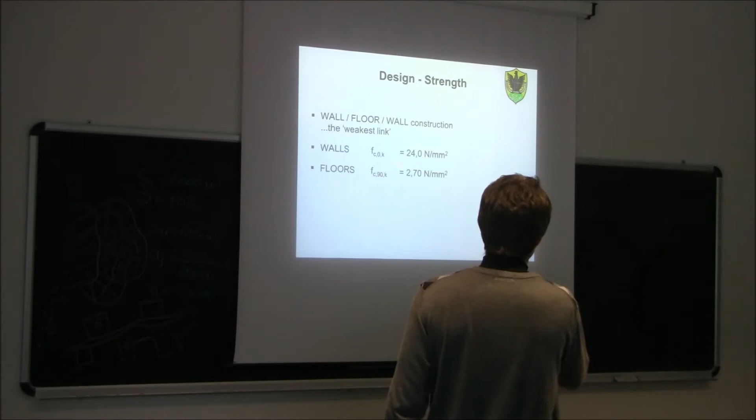So the weakest link comes from the fact that we have a floor which has a resistance of 2.70 Newton per square millimeter perpendicular to the grain, and it is squashed by walls which have 24 Newton per square millimeter resistance. So at the end, this is almost less than 1/10, and this is going to govern the design. So that's why, particularly at the lower stories, when the load becomes higher and higher, they have to strengthen, you see here, the connection between the wall and the floor.

And the way to strengthen it was, as we already discussed several times before, to use some reinforcement, self-tapping screws that in some way help transfer this pressure from the edge of the wall itself into the panel itself. So in other words, with the screws we're going to distribute this concentrated load above and beneath the wall into a larger area within the floor itself. Okay? So that's the kind of reinforcement that was done here.

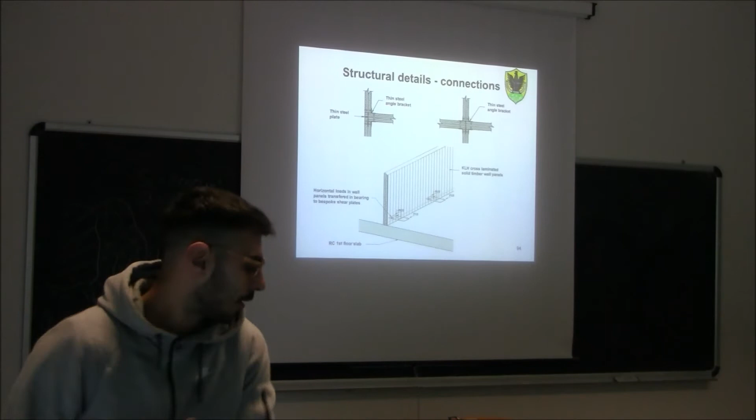So here you can see the type of connection. In this case, we have no different connectors for resisting the uplifting force and for resisting the shear force. So we have only one type of connection, this kind of angle bracket connected with screws and nails, that functions as hold-downs when placed at the end of the wall, and as angle brackets when placed in the middle of the wall. So no difference between hold-downs and angle brackets, only use of angle brackets. Why is that?

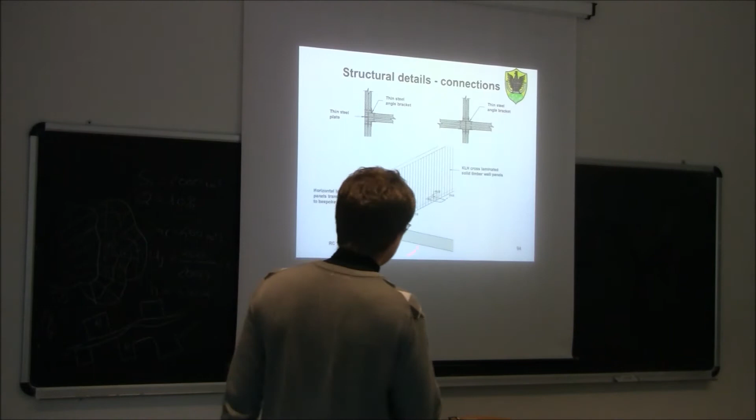Because, again, we are talking about design and construction of a building in London, which is not a seismically active region. It's also not a very strong wind region, meaning that the horizontal forces don't play such an important role, like here, for example. The hold downs are mostly meant to resist uplifting, so axial force, but in this kind of building we don't have very high uplifting forces because we don't have earthquakes, and the wind is not very strong. Okay?

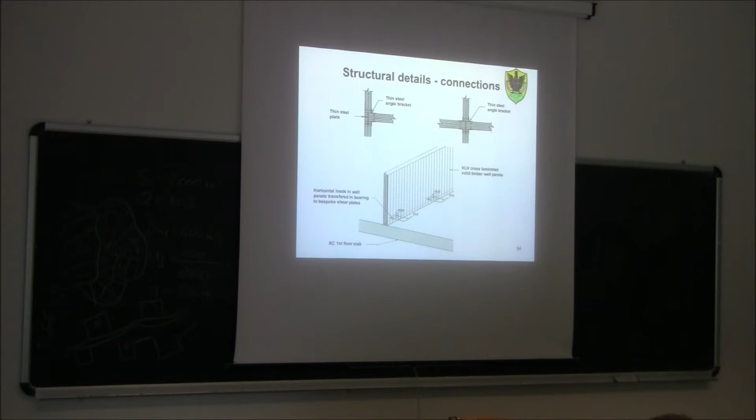And then you have another point of the building, which is quite important because we're talking about a 9-story building. A very important problem with any multi-story building with residential destination is acoustics. As you know, acoustics is a serious problem, even with reinforced concrete. Sometimes we have a problem that if you have two different apartments, one above, one below, very often who lives below can hear what they do above and vice versa.

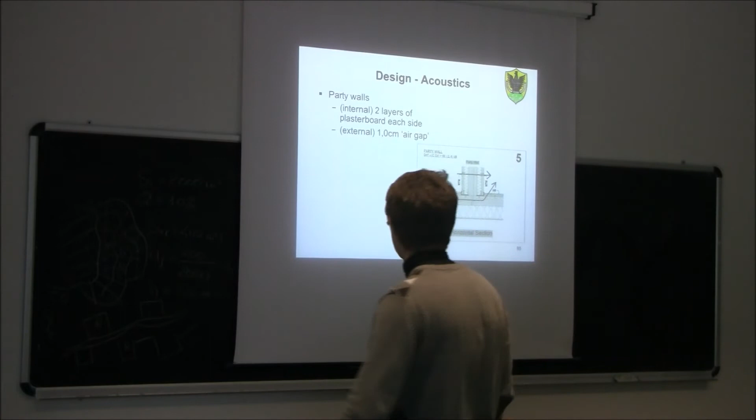So how can we solve the problem of acoustics? Just keep in mind that acoustic separation depends on the density of the material. So if it's concrete, you have 2,500 kilograms per cubic meter. If it's wood, you have only 500, so 5 times less, meaning that the acoustic separation is also 5 times less. So with timber, we might have a problem. So how to solve this problem?

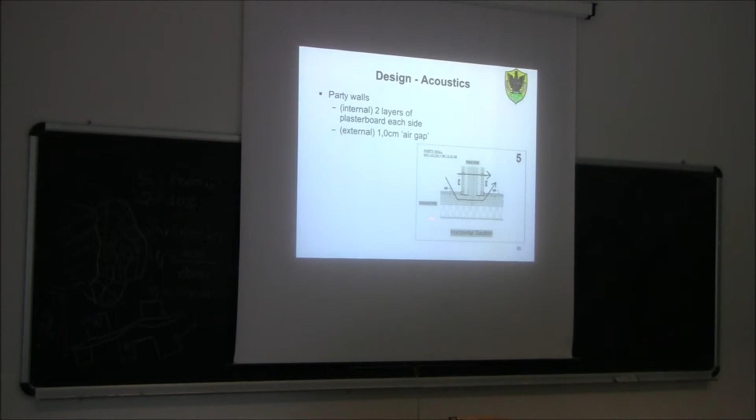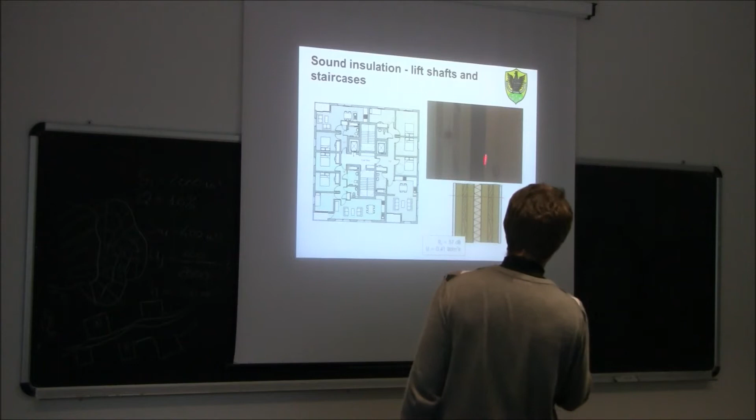We have different details. You can see here some possible details for party walls and floors. For example, you see that we have a double wall at the interface between staircases and living units, because in this way, first we have a larger fire resistance, but also a larger acoustic resistance. You see two panels with acoustic insulation in between. Of course, the simple solution is this one, where the acoustic separation is very poor, and then you have different possibilities in order to do the acoustic separation.

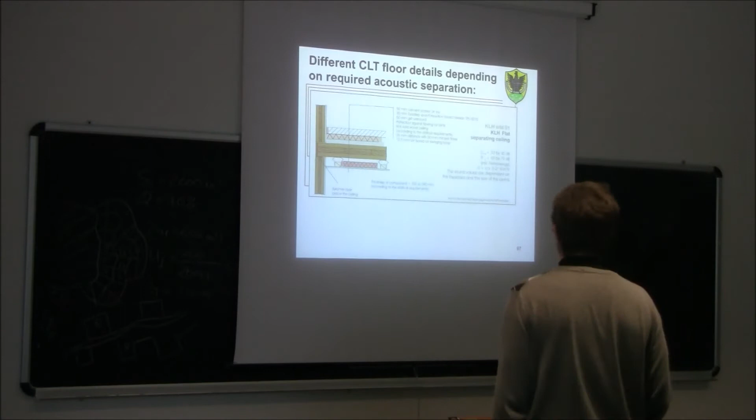Other possibilities are with, for example, some resilient ceiling below. And you can also go to much more performing solutions, like having a double floor, and so on. In terms of fire, there was a minimum fire resistance required in this building, because we're talking about a residential building.

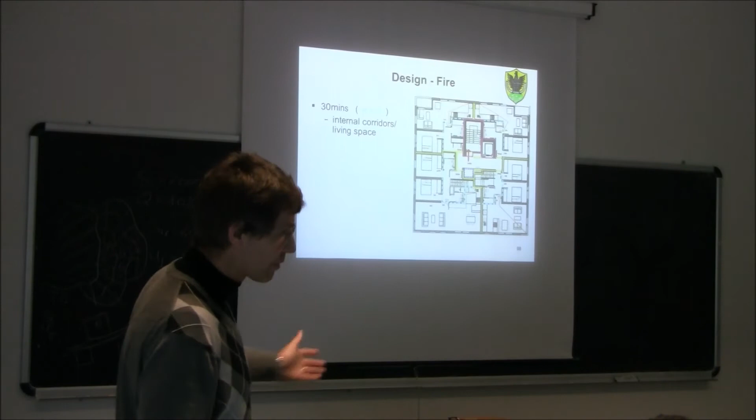So, as you can see here, these dashed lines show some walls that had to have at least 30 minutes fire resistance. Now, we haven't spoken so far about fire resistance. I will give you a final lecture discussing fire resistance, because of course for timber it's important, being a combustible material. So 30 minutes of fire resistance basically means that if you have a fire on either side of this wall, this wall should be able to stay in place and resist the vertical load for 30 minutes at least, and during these 30 minutes it shouldn't allow flames to go through, and it should not transfer too much heat from one side to the other.

So what we usually call REI in Italian, which is resistance, isolation from the heat, and isolation also from the smoke. There are basically three parameters. We will see later on. So basically, all these walls within the dashed line had to be at least 30 minutes fire resistance, which are the walls between the internal corridors and living space, or between the day or night rooms and the corridor. Then 60 minutes separation between different units, and between the units and the egress system. And 120 minutes for all these walls around the lift shaft and the staircase.

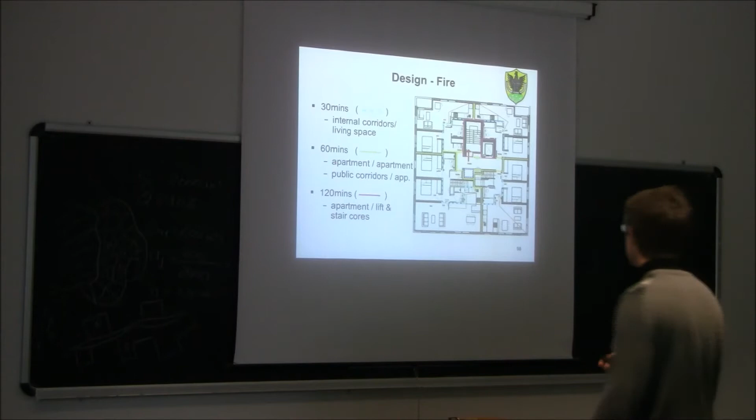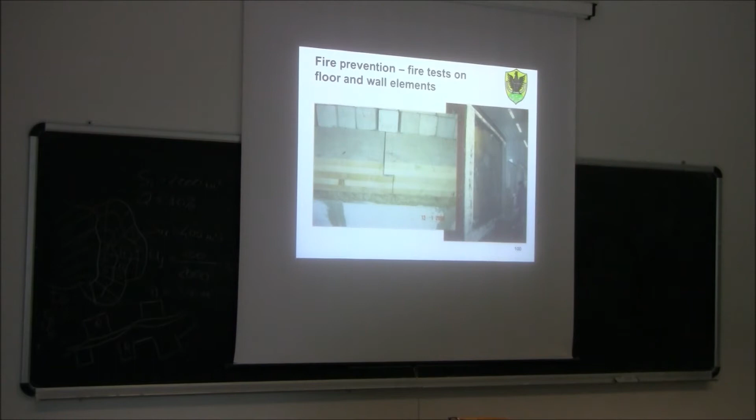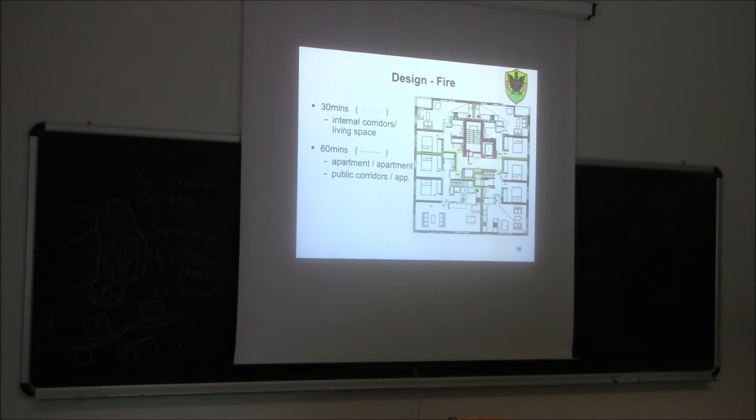So in the end, the result of this experimental campaign was that the fire resistance of all load-bearing components was 90 minutes. So one panel like this can resist up to 90 minutes. The fire resistance between apartment, lift shaft and staircase was 120 minutes because 2 panels were used. So around the lift shaft, where 120 minutes fire resistance was required, a double panel was used in order to get a higher fire resistance.

Some photos about... yes, interesting thing: they didn't have to use any sprinkler system. You know what a sprinkler system is? It's a kind of system using water that can spray water once the fire is detected. For example, here we could have fire sprinklers inside here. Probably you don't see anything.

There is something... no, this is just... we don't have. But why we don't have? Because we don't have lots of combustible materials inside. Here the combustible material is basically this. Nothing else, except of course the clothes. For this reason, probably we don't have such an important risk to impose the use of sprinklers and fire detectors. Here we don't have either sprinklers or fire detectors. We just have the board indicating that we have to go away.

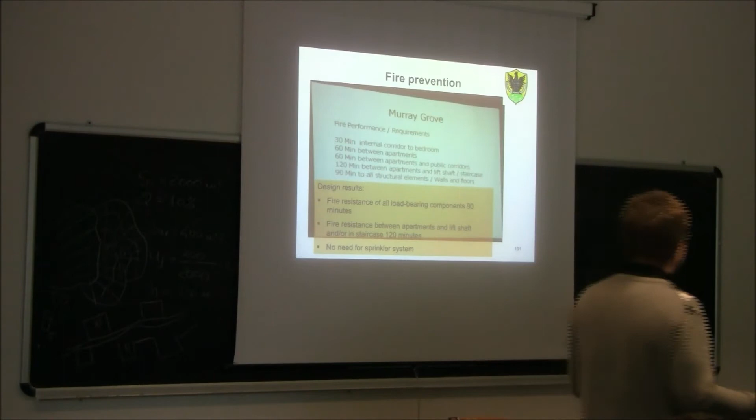Okay, so in this case again, although the building was quite high, and there were thousands of cubic meters of wood, which is potentially combustible, no sprinkler system was required.

Okay, some photos about the construction. You can see here this group of 4 skillful carpenters. So here, we are on the top of one of the floors. So this is the floor, basically. So first you see they place these angle brackets all around, already screwed. And then you see the panel is coming, and then the angle brackets are connected to the wall panel. Of course, the panels are as long as the whole wall, if possible.

They are already cut. So all these panels you can see here with the cuts were produced in Austria, and they were shipped by lorries from Austria to London. Temporary props here: as we said, we have a box without the lid, meaning that the structure is not very stable, and we need to use some temporary props like here. Another photo. This is the building upon completion, towards the end of the project.

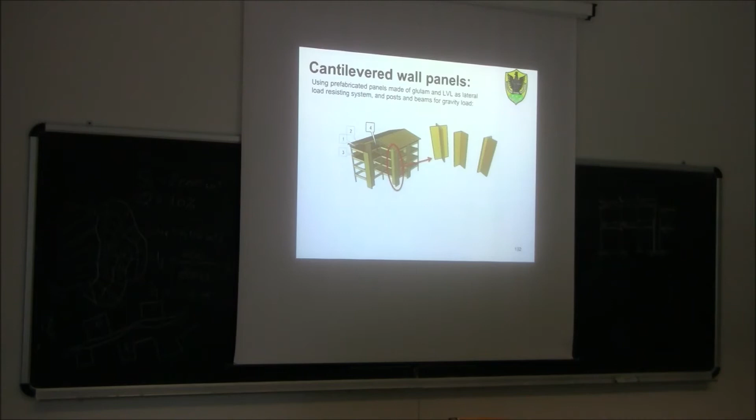Here the wall can be made, you see, by assembling together some simple rectangular elements. Those rectangular elements can be solid, or, like in this case, made of a glulam frame with top and bottom sheathing made of LVL.

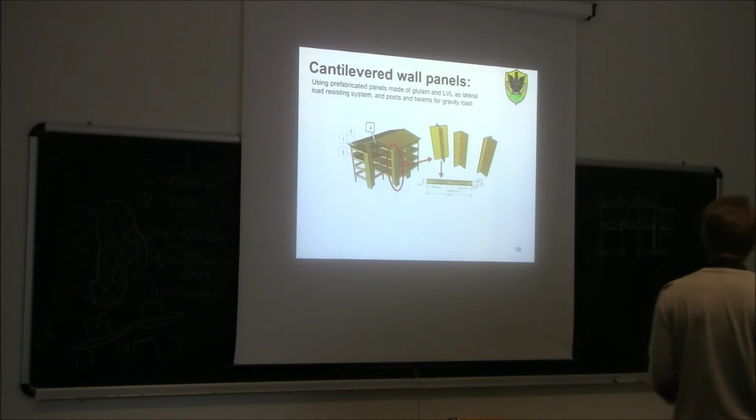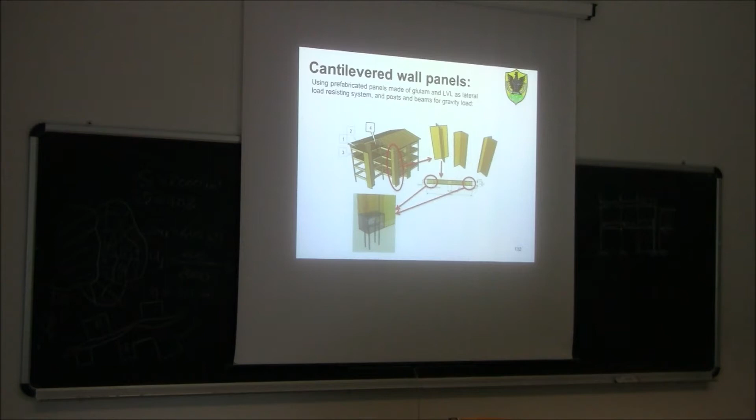The connection of this panel to the foundation can be obtained using, for example, this steel hub, which connects the wall to the foundation using epoxy rods. So rods which are glued inside the wood on one side, and, more than glued, connected to the foundation using some mortar on the opposite side.

This is a photo of this detail, and this is the result of experimental testing where we push the wall laterally, like in the case of an earthquake. If you push it, the wall tends to uplift here, and of course we may have a failure in the glue connecting the rods with the wood panel itself.

This system is particularly suitable for open spaces, because having a system made of posts and beams, you can have spans from 5 to 8 meters long.

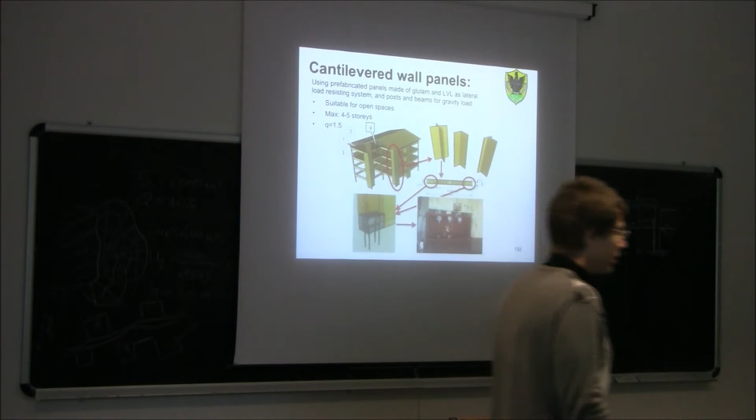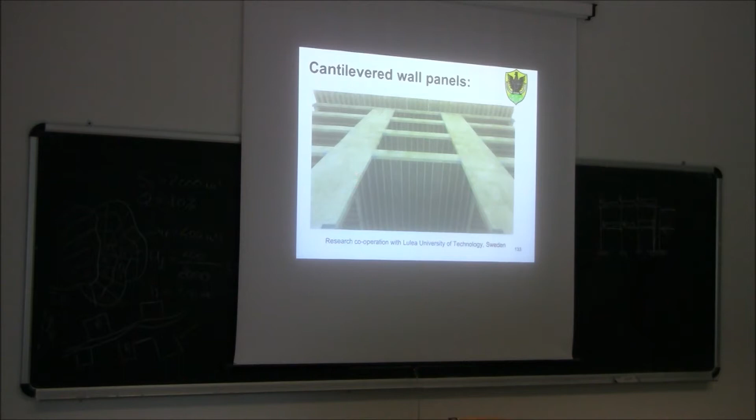Of course, with this kind of building, we cannot go too much in elevation, 4 to 5 stories, and the behavior factor is a kind of low value, could be, I would say, 1.5, like in the case of the building you're designing in your project. This is a rendering of this kind of structure, so those walls here are the lateral resisting system. Then you have the floors, and the beams, and then the columns inside.

This is another kind of connection between this cantilever wall made of glulam and the foundation itself, using a steel plate with some bolts. A kind of advanced connection is this one, where an innovative viscous damper has been used. So here this is a kind of viscous damper connected to the wood using this kind of pre-drilled screws.

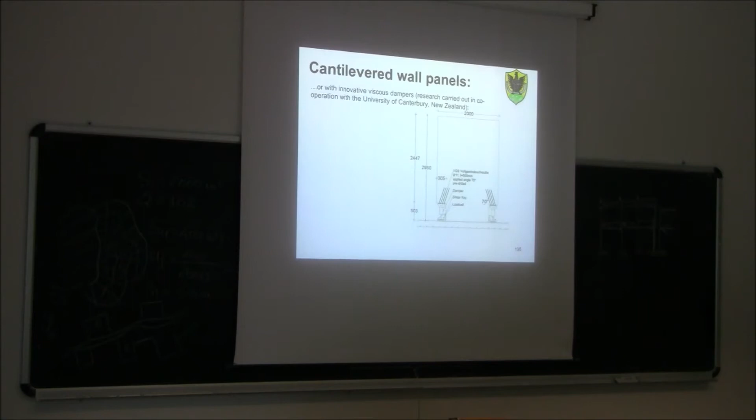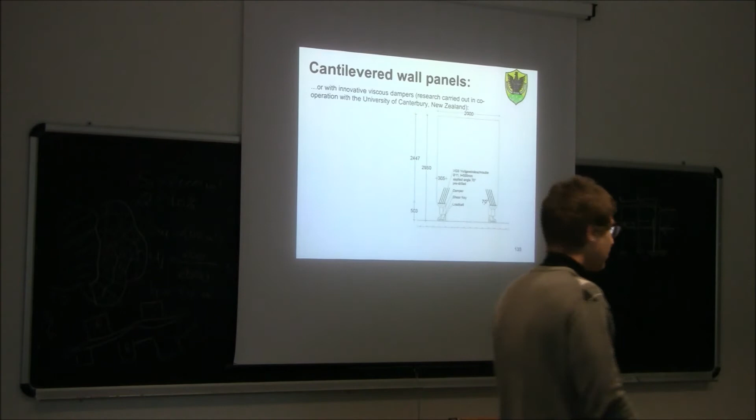So anytime that the wall moves due to the horizontal force, it tends to rotate. So we have some energy dissipation inside this device due to the fact that the wall is going to rock, so to move, and then the device is going to be stretched. So it then goes up and down. Inside this device there is lead, piombo, which, by deforming itself, is going to dissipate a significant amount of energy. So that's why this element is called energy dissipator, because it's going to dissipate energy during the typical rocking motion caused by an earthquake. Here is a photo of this damper.

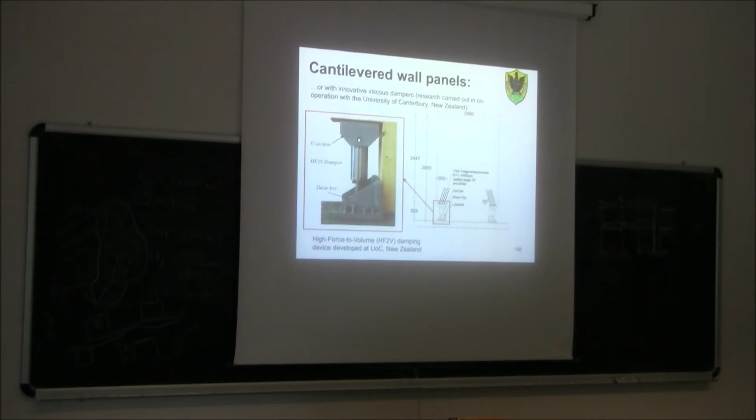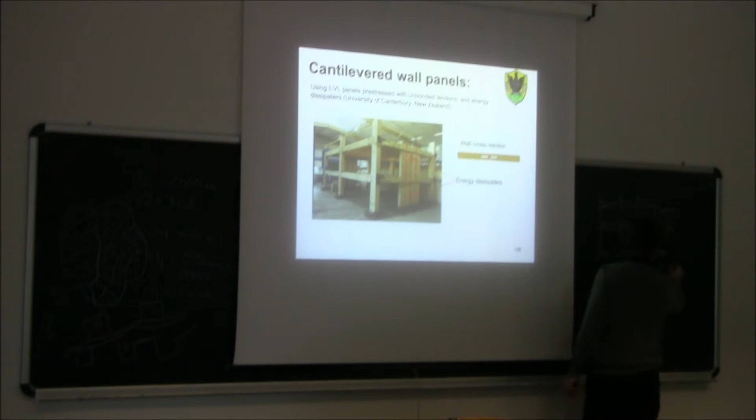And this dissipator, as you can see, is going to deform. This dissipator basically could be a piece of steel done this way. So when this is going to deform this way, the dissipator is going to deform. So the wall is going to rock rigidly, the dissipator is going to deform, and then we will have some energy dissipation during an earthquake.

The advantage of this system is that at the end of the earthquake, since there is this pre-stressing tendon always trying to bring the wall back to the initial position, this pre-stressing force applied through the dissipator will basically bring back the wall to the original vertical position. So in the end, we don't have this problem of residual deformation typical of the earthquake.

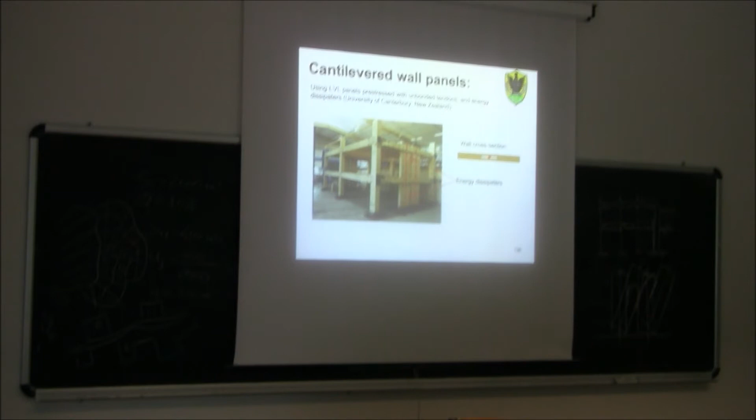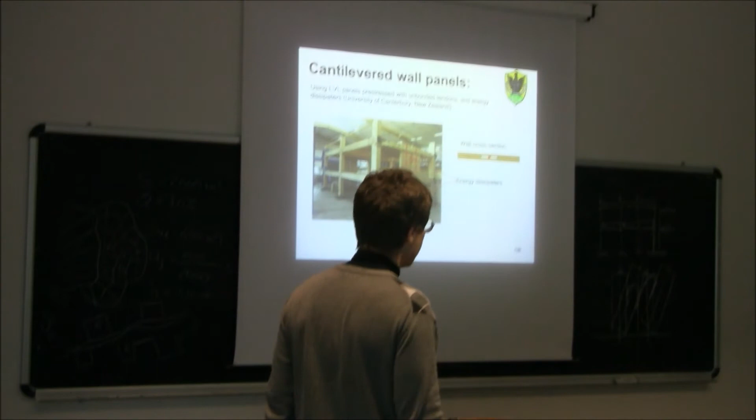You know, after an earthquake, very often buildings don't fall down. They stand somewhat twisted, so they don't stand straight anymore. They're inclined, but by using this pre-stressing steel here, at the end of the earthquake, the pre-stressing strand can create a force that can make the system go back to the straight vertical position where it was before the earthquake.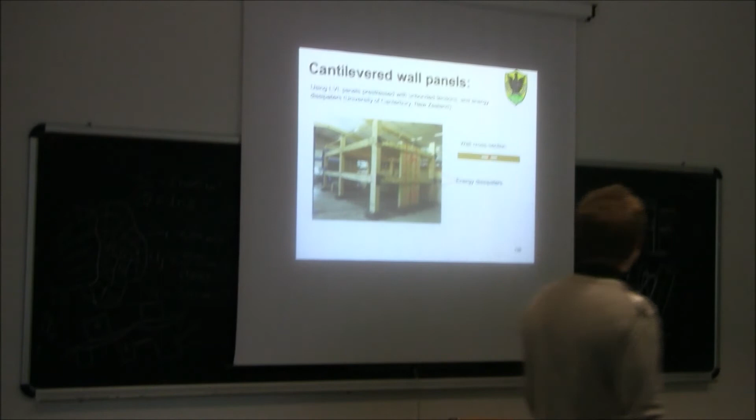You can see here the application of this concept to this big building being built in New Zealand. So walls made of LVL, pre-stressed walls, and then in between there are some energy dissipators. Those are the energy dissipators. You can see some U-shaped metal plates which are connected to other plates which are in turn connected to the wall itself. So when this wall is going to deform, this dissipator is going to deform in this way.

So it's going to dissipate energy. This is the lower part where we can connect the strand coming from the top that will apply the constraining force. And this is the timber composite floor that was used at the intermediate story.

You can also use moment-resisting frames made of timber. Just a reminder that in terms of timber, we never have a real fully rigid joint, as we said before. We can have a fully rigid joint only if we use glue. Otherwise, we have a semi-rigid connection. So moment-resisting frames, in general, are suitable for buildings with open spaces, because of course, moment-resisting frames don't take a lot of room.

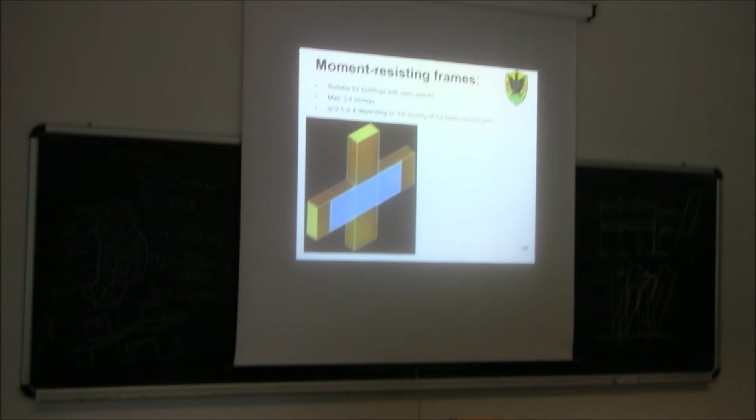So this is a first type of beam-column connection using nails and plywood gussets, steel gussets. In this case, we have some loops of nails on the beam, some others on the column, and some others on the opposite beam. Or we may use epoxy glued rods inside the wood, inside the beam, connecting the beam with the column and with the other beam.

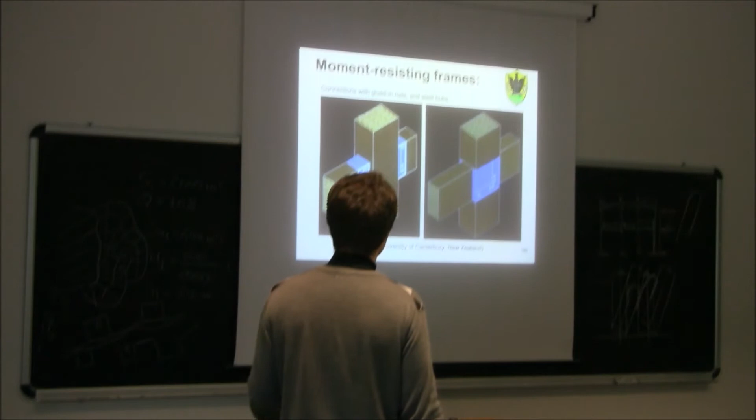Another possibility is to use this kind of steel hub connected with the wood using epoxy glued rods. This would probably be the best possibility to get rid of this portion of the column, which is subjected to horizontal loads coming from the beam, applied perpendicular to the grain, a direction where the resistance of the material is very low. So we can think about removing this piece of wood and replacing it with this metal hub, which can be connected with the wood using these rods here, glued in the timber.

There is a kind of beam-column joint with high ductility using expanded tube fasteners that was developed at the Delft University of Technology in the Netherlands. This joint uses expanded tube fasteners and densified veneer wood. So, for example, for a building like this, we may use in one direction the cantilever walls as a bracing system, and in the other direction the moment-resisting frames.

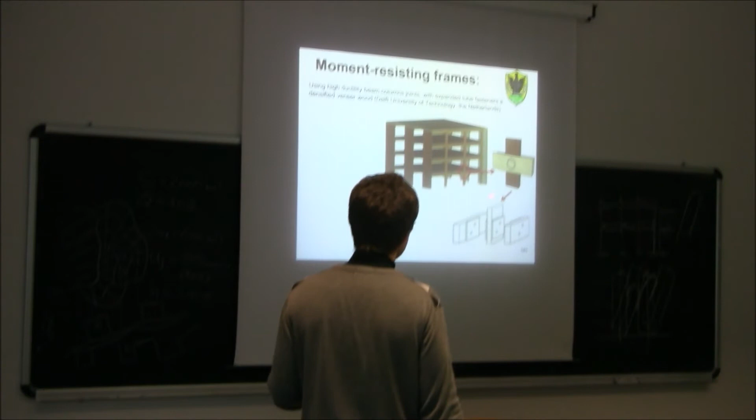For the moment-resisting frame, the column could be made with a rectangular cross-section, and the beams could be made by two parallel elements. The connection between the two parallel elements and the column could be made using expanded tube fasteners arranged along a circle like in the figure. In this case, you see that in addition, on each side of the connecting member, we have the use of what we call densified veneer wood.

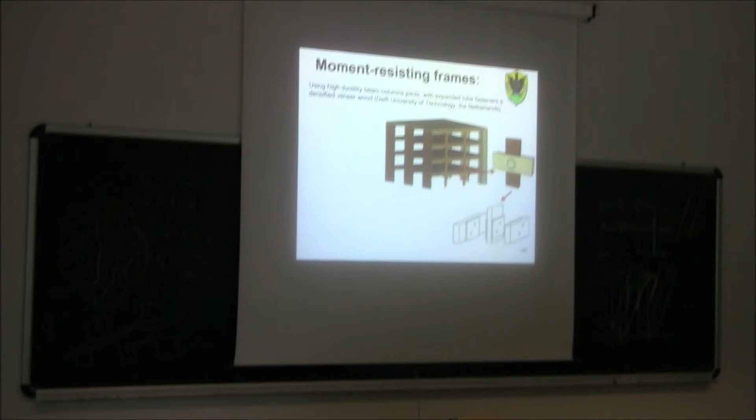So densified veneer wood is wood which has been artificially densified using a press. The wood itself has been pressed in order to increase the density and so get a material which is much stronger. So the expanded tube fasteners are those metal tubes that you can see here. The fastener is basically a metal tube. This is one beam, this is the column, this is another beam, and you can see that at the contact between the beam and the column there is densified veneer wood.

So this black-brown layer is actually two layers. One layer is one plate of densified veneer wood. So half of this layer is the densified veneer wood glued on one side of the column, and the other half is the other plate glued on the beam.

Once we apply a moment to this joint, you can see that we can get a very high deformation within the expanded tube fastener. Particularly, the use of this densified veneer wood is to make sure that we will have a plastic hinge formation here and not somewhere else. In other words, having this expanded tube fastener in contact with this very high density veneer wood means that we may have the formation of a plastic hinge actually here at the interface. So we can have a very plastic behavior of the fastener itself.

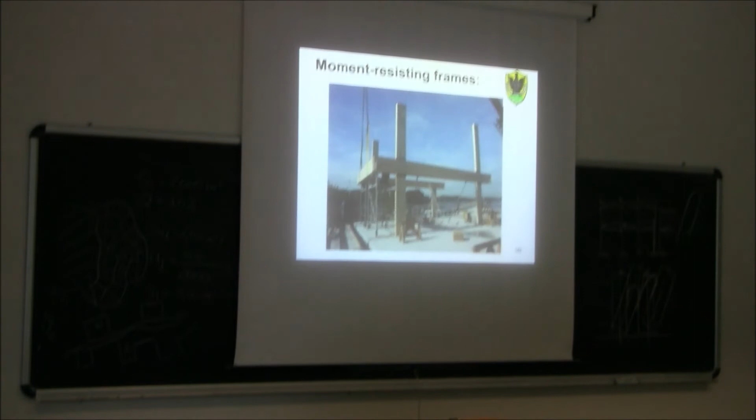This is an example of a real structure being constructed in the Netherlands. The other possibility is to use some pre-stressing cables, pre-stressing tendons, to connect columns with the beams, like in this structure here. So this is an example of a pre-stressed timber moment-resisting frame, where we have some tendons running in the cavity of the beam. So basically, in this case, this is a cross-section of a beam that is made of LVL.

So the LVL beam is made by gluing together 4 pieces, done in this way. They are glued together, and in between there is this cavity where there is a pre-stressing tendon. This tendon, as you can see, is fixed on one side of the column. It runs all the way through the two beams and the intermediate column, then it ends up on the opposite column. So we have a situation like this: column, beam, column, beam, column, and the pre-stressing tendon runs in this way.

Very often this system is coupled with some energy dissipators placed here outside at the interface between the two members. Of course, this kind of system is an innovative system, still hard to use, but it has been tested in New Zealand, and it has been used for a few buildings. One important problem of this system is that in the long term we can expect some losses of pre-stressing force within the tendon due to creep, shrinkage, all these problems within the timber.

Okay. Another kind of system extensively used for multi-story buildings is what we define as a hybrid system. What do we mean by a hybrid system? We mean, for example, that wood can be mainly used for gravity load resisting systems, whilst other materials, for example steel or reinforced concrete, could be used for lateral load resisting systems. So we use different materials and make two different structures, one for gravity load and the other for lateral load. This is suitable for open spaces, like an office building. We can get up to 10, 15 stories.

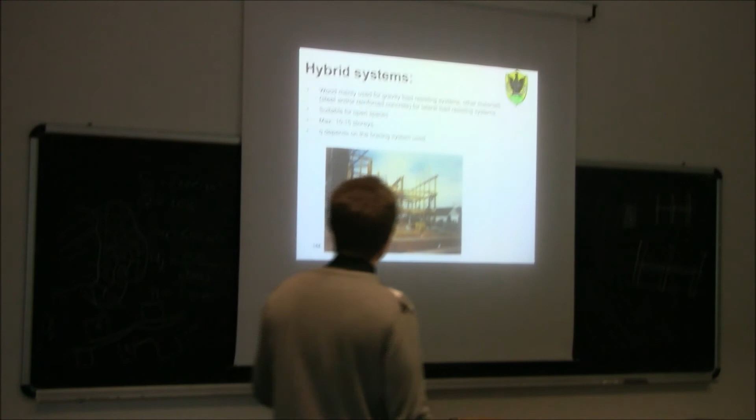And of course, the value of the Q factor will depend mostly on the bracing system that you use. If you use steel, we will have one value; if you use reinforced concrete walls, for example, we will have another value. So this is an example. Here you see basically a concrete staircase inside, and a system of posts and beams made of glulam. So again, we have a system where there is an inner core resisting bending moment, taking all the lateral forces, and then a system made of timber posts and beams resisting the vertical loads.

This is another system where, in this case, moment-resisting frames made of steel can be used along the facades, and inside, timber posts and beams are used to resist the vertical loads. Two significant examples of hybrid buildings built in our country: two 6-story buildings, one constructed in Trieste and one in Caorle, in the province of Venice. They were both built by the same company, Holzbau, so they both use a similar technique.

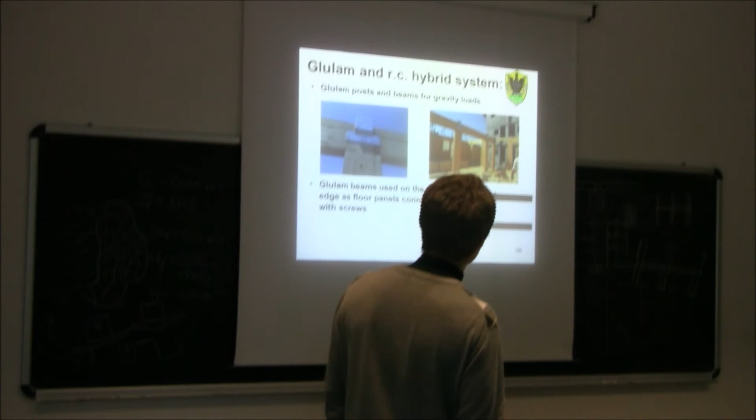So this is the beam made of glulam. And here we have floor panels made again of glulam, glulam which are placed on the edge. So columns, beams made of glulam, and glulam beams used on the edge as floor panels, connected with screws. So basically the panels are made by glulam beams which are produced with a depth of 2 meters, and then those beams were used on the edge as floor panels and connected using screw connections.

Some photos. So here you can see the glulam column, the glulam beams, and the glulam floor panels on top. And here you can see the connection between the glulam panels and the beams using inclined screws. Just a reminder that screws are being used inclined because this way you can get the maximum stiffness.

In this case, as you can see, there is a staircase made of reinforced concrete which is going to resist all the lateral forces. So all the structure you can see here, posts, beams, and floor panels, they are basically resisting only the vertical load, while all the lateral load is being taken by this reinforced concrete staircase.

So in this case, as you can see, the type of construction: first the foundation, then the staircase made of reinforced concrete were built, and then the whole timber structure was built with this kind of connection between staircase and beam itself.

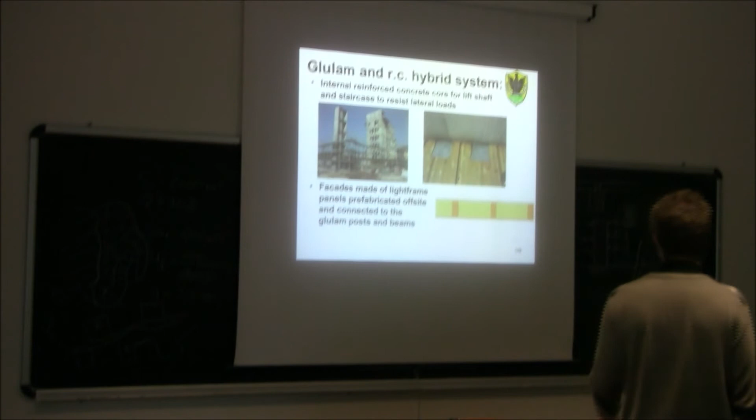The facades were made of light frame panels prefabricated offsite and connected to the glulam posts and beams. So we have panels like this, they're all prefabricated. Here you can see the prefabrication of the panel, placement of the panel on the lorry, then delivery to the building site, and craned into position. Another photo from outside, looking at the building being under construction.

And this is the scheme, the typical resistance mechanism. So we have a plate foundation, we have the staircase, resisting like a big cantilever to the lateral forces, and instead the timber structure is made by posts and beams, resisting mostly the vertical loads, down to the ground below.

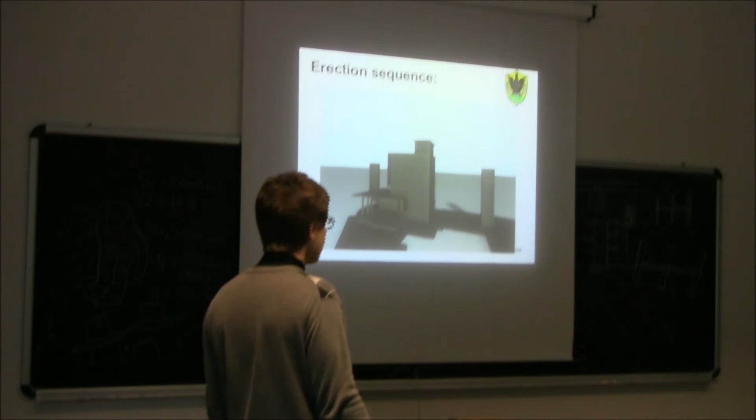Erection sequence: first we start with the foundation, then we build the lift shafts and the staircase, and then we start building the timber structures. So, vertical structure, then we have a floor, another floor, and so on, until we get to the top of the structure.

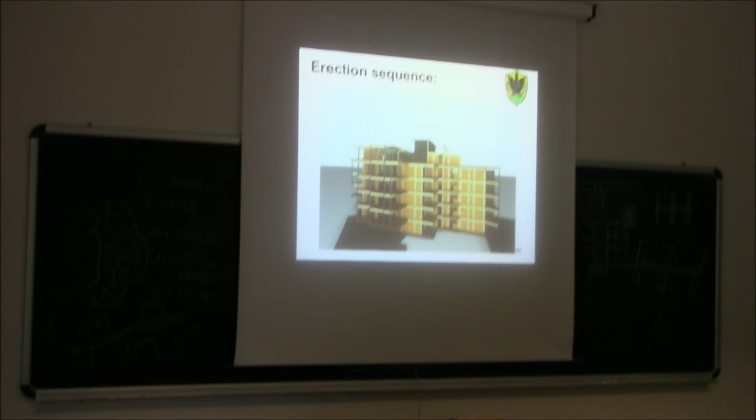Construction time, September 2011 to November 2011. So a couple of months to build the whole timber structure. Again, also here, most of the time was spent to build the reinforced concrete staircase, and instead the timber structure was built very fast.

One important problem that we always need to take into account when we design a residential building is the problem of vibrations. In order to get rid of this problem, the rule is to discontinue floor panels on the supporting glulam beams to avoid vibration transmission.

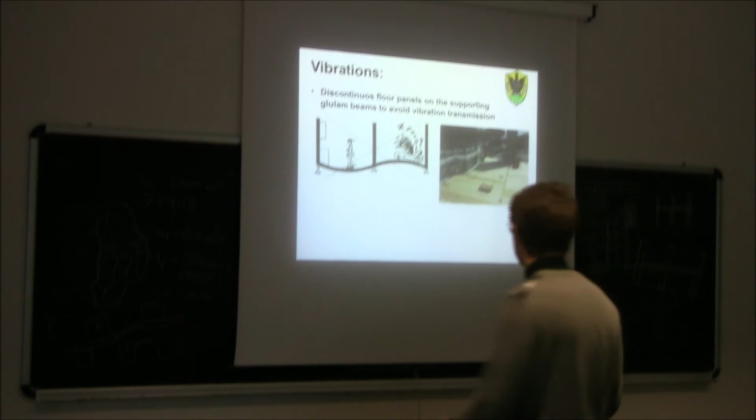So the idea is that if we have a continuous floor panel, of course if I'm going to jump on one side, also the people on the opposite side will feel the vibration. So in order to avoid the transmission of this vibration, it's a good rule, rather than having a continuous span, to have two separate spans, one on one side, one on the other. Some details about the load supporting timber beams, the floors, the insulation, and so on.

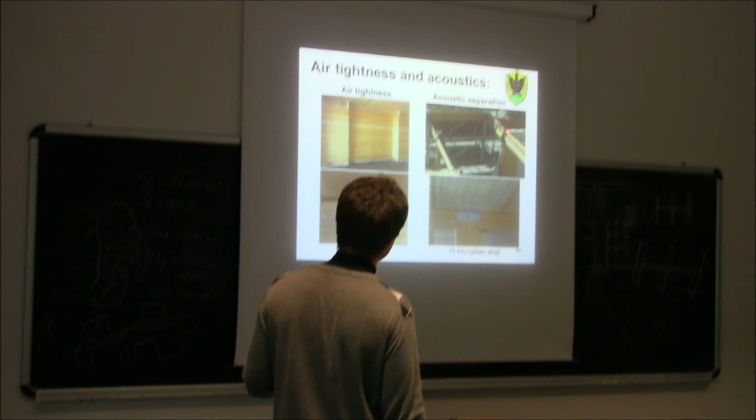Insulation. The external insulation is usually made using cork panels. And also here it's important to ensure air tightness using this kind of tape, with which we should just cover the joints between panels. For example, you can see here 20 km of tape were used. Acoustic separation: so here we have this rubber strip just underneath the wall panel, at the contact between the wall panel and the timber beam. So 10 km of rubber strip were used.

Another example is a multi-story building called modular system, where everything again is prefabricated. So in this case, the system is made by wood double columns and a hybrid slab, a timber concrete composite structure. You can see here an example of construction. So the whole facade panel is delivered to the building site, and it is lifted into position.

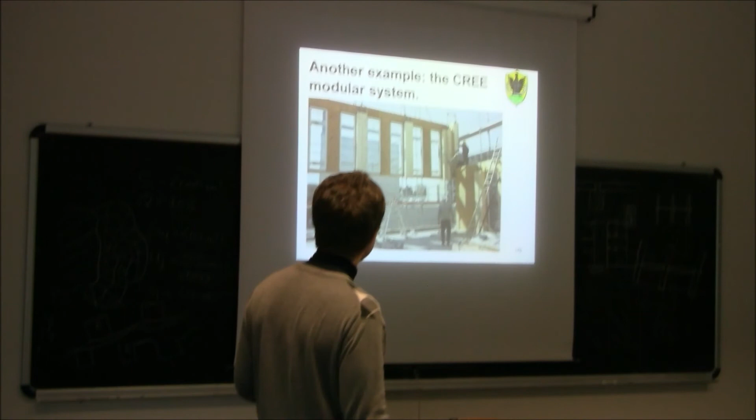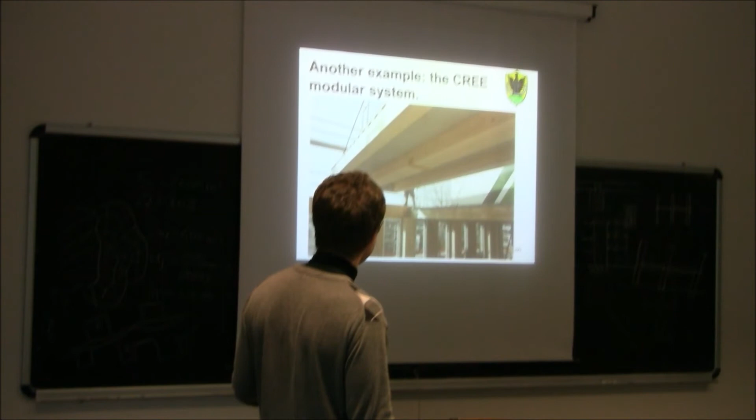Those are the prefabricated timber concrete composite panels. So the whole timber concrete composite panel is prefabricated offsite and then placed inside these towers that you can see here at the end. So the vertical panel has already included some columns with this kind of bars protruding from the top of the column. And in this prefabricated floor panel there are some holes. So they are lifted into position, and those holes will go onto these big dowels here.

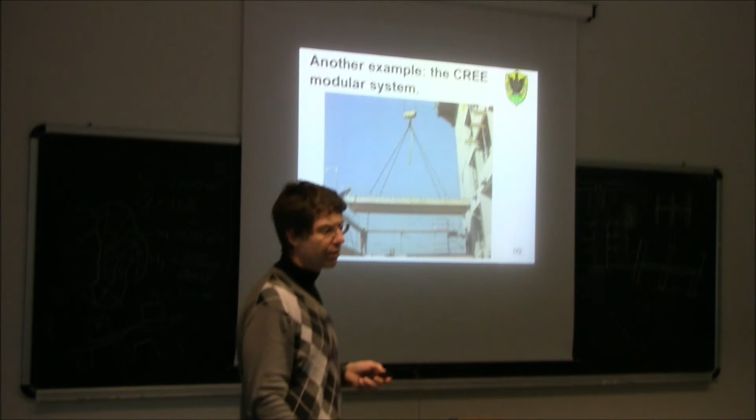Another photo of the panels being placed on the building. In order to get the continuity of the concrete slab, we have this kind of holes here that later on will be filled using some mortar, basically high resistance mortar, to get the continuity of the slab.

Is there glue here, or are they just...? No, they're just this way. Yes.

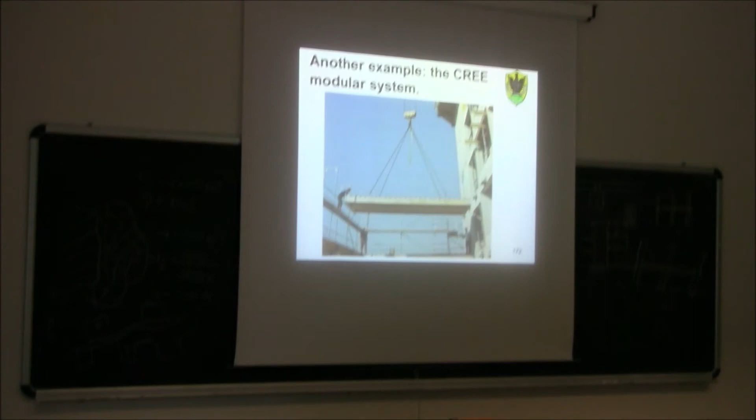This one is using some mortar. Temporary props. This is a detail from underneath those vertical towers we saw before. Consider those panels are quite heavy because they're made of timber and concrete. So they basically stay in place from gravity.

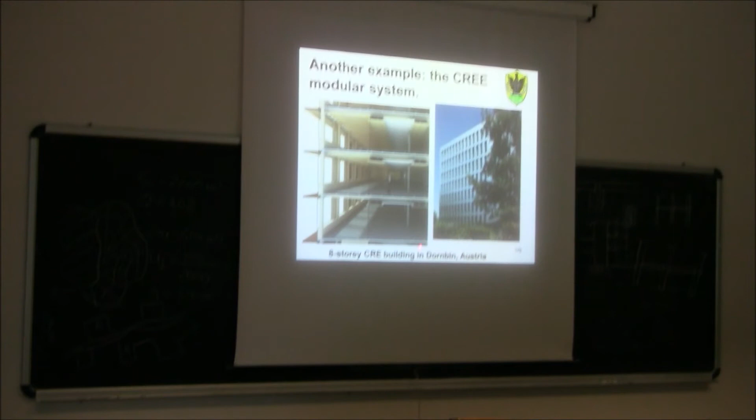They cannot be uplifted. Another photo shows us, for example, the use of building services underneath the reinforced concrete between the timber beams. And this is the 8-story building using this technology.

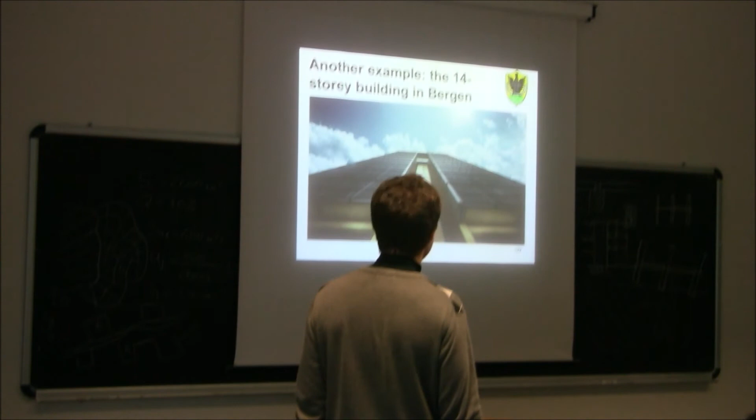The last example, interesting to see, is what can be regarded as the tallest timber building in the world, which is this 14-story building in Bergen, in Norway. This is a drawing from outside. So this is the building. It's called the Tree. A net area of 5,230 square meters. It has 62 apartments. The work started in April 2014, and the residents could start living there in autumn 2015.

So, this system here is made with a structure which is quite different from the system we saw before. First of all, as you can see, there is a kind of glulam truss system. So the main structural system is this glulam truss system, which makes this building a huge cantilever fixed on the floor and free to move on the top.

Inside this building, some modular units have been used. So the building is an assembly of a number of those timber frame modules you can see here, compliant with the passive house standard, meaning that they are done very well with very high thermal insulation, in order to get a very good thermal performance.

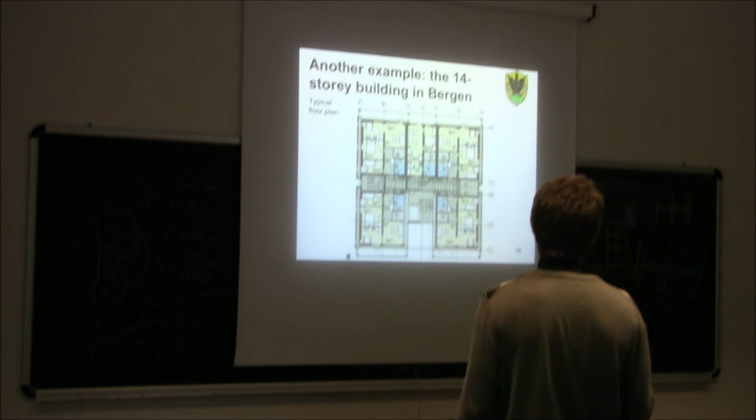This structure rests on the top of a reinforced concrete foundation garage, which is supported by some pile foundations. It is a lightweight building, and if you can see here, this is the typical plan. To cover this plan, 9 units were used. You can see here that we have 1, 2, 3, 4, 5, 6, 7, 8, 9 units. So the floor is made by prefabricated units. So 1 unit is basically what I showed before, so this would be 1 unit.

But this unit has everything inside. There are already the services, the plants, the toilet, everything is already ready inside. Sometimes also the furniture, using IKEA, of course, as we are very familiar with Sweden. So the whole module arrives already ready to be used on the building site. And this module is then placed inside here and connected to each other and connected also to the main structural element.

Just note that the main structural system is basically this structure you can see here. So there is this 3-dimensional truss system made of very big glulam members, which is a truss with connections. And then you can see that we have 2 very strong plates. Those plates, 1 and 2, those floors, are made of reinforced concrete.

So in the end, the building, if you want, is like a cabinet, as we said before, a cabinet like this, where we have this truss system, with these very rigid floors made of reinforced concrete. And then on top of these floors, we place these stacks of units. So the units are basically stacked one above the other, and they are all supported by these reinforced concrete floors.

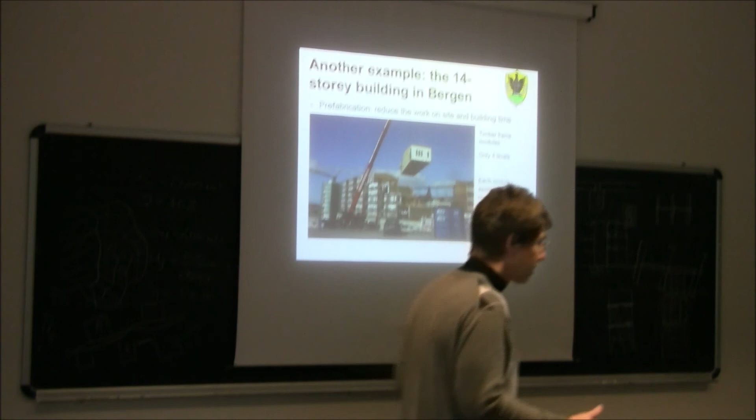Is it clear? It's a kind of strange system, but if you look, for example, at the very tall towers that are built in the big cities in the world, very often we have this kind of structure. So we have some main floors, very rigid and very stiff, made of reinforced concrete, also to achieve significant fire resistance, because they are made of non-combustible material. And then on top of this, we have these stacks of modules, all connected together, but not connected to the main structure, just founded on the floor itself. Okay?

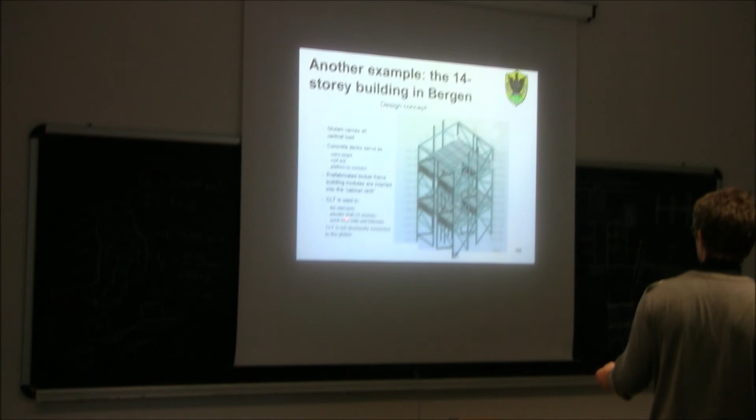So, glulam carries the vertical load, the structure you can see here. The concrete decks, 1 and 2, serve as extra weight, roof and platform for modules. They are used as a kind of foundation for the modules, which are stacked one above the other. Prefabricated timber frame building modules are inserted into the cabinet rack, so they are just inserted inside. CLT is used in the staircases, elevator shaft, some inner walls and balconies, so the CLT member is independent. CLT is not structurally connected to the glulam.

So here, as you can see, the main structural system is made of glulam, a three-dimensional frame, a spatial frame. The prefabricated modules are stacked up to 4 levels, connected to the main structure at the base. The glulam sections are those you can see here. The glulam section is basically 495 by 495, so it's quite big. The beam is half a meter by half a meter.

We can't really prefabricate a section so large. So what they usually do is start with 3 rectangular cross sections, 165 by 495, and then they are block glued. They are glued together along the larger surface in order to get a unique, solid cross section.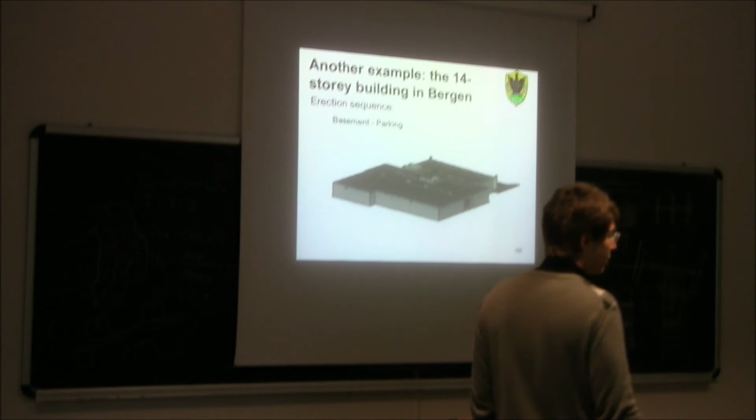Erection sequence. Starting from the parking, the basement, so reinforced concrete from the foundation, the first wall and the first floor. Then you see we have a stack of 4 level modules which are independent. Then we start with the construction of the structural system of the big building with the glulam and the crosslam. One more module. Then here basically this blue structure is independent. The brown one is also independent.

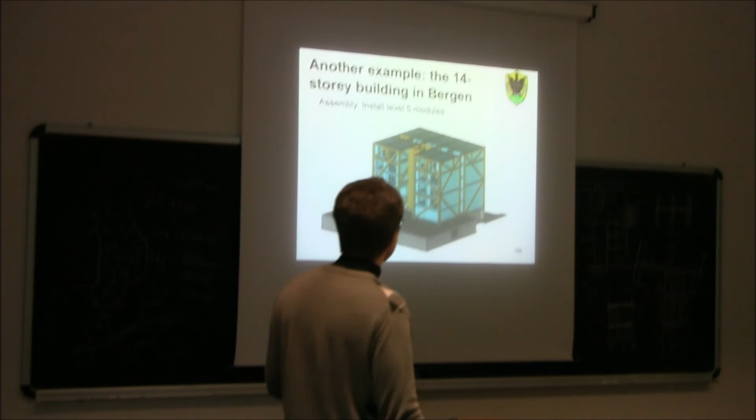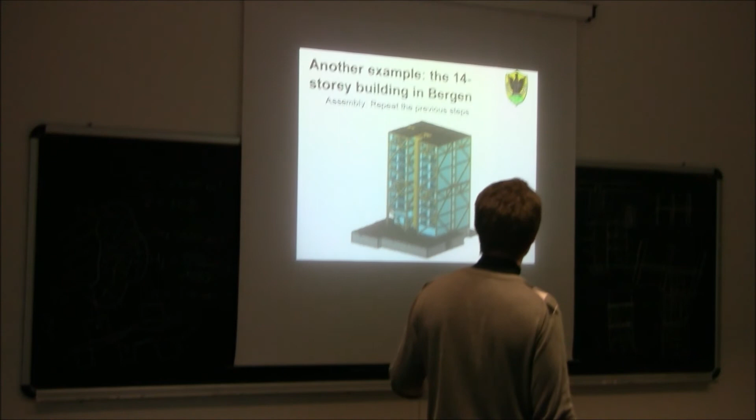Okay, the last thing I wanted to discuss with you before we move to the next presentation, which is about seismic design, is the use of passive base isolation. Passive base isolation will be one of the most important subjects of the Earthquake Engineering course you will follow next year. So here in this course we don't say anything in particular, I just wanted to mention that passive base isolation can be used also for timber buildings. Of course, it can be used for any material. Usually it is used for reinforced concrete buildings, but it can also be used for timber buildings.

And we have some examples here in L'Aquila, as you know. In Progetto Case, more or less half of the buildings are made of reinforced concrete, supported by plates, base isolated. And the other half of the buildings are made of timber, I would say 25% light frame structure, the other 25% crosslam. They are all passive base isolated. So the idea is to disconnect the building from the foundation, as probably all of you know.

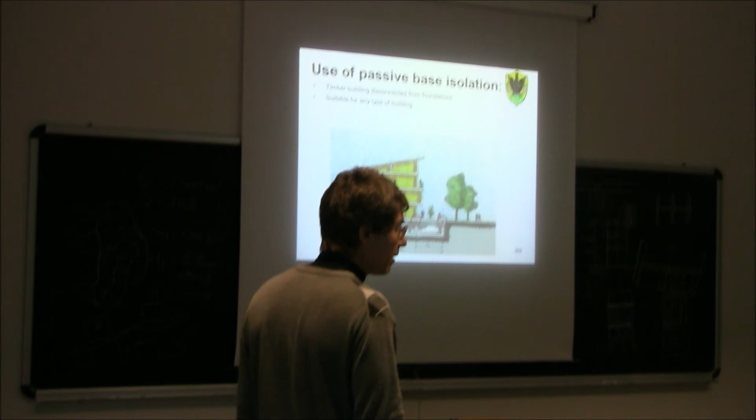This is of course suitable for any type of building. For timber, you have the additional advantage compared to concrete, that's the weight. The weight of this building, made of timber, will be more or less 1/4 of the weight of the same building made of reinforced concrete. Meaning that you can spend much less money when it comes to build and design this plate, and also to build and design the isolator. So for a timber building it's actually better because you spend less money for the isolation.

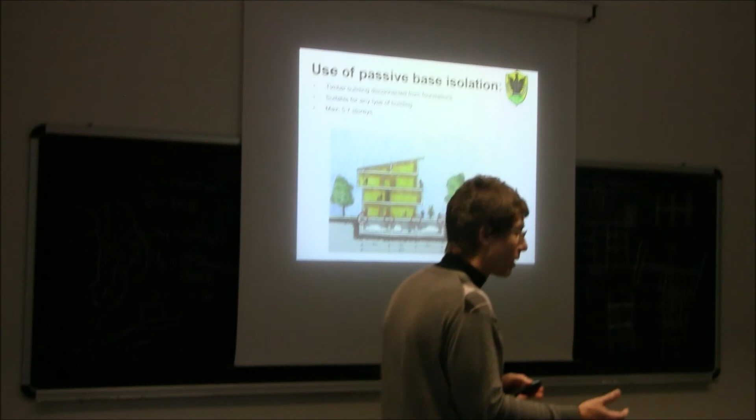However, for the timber building, you need to be careful about the fact that having a very lightweight building, what could happen? If, for example, instead of an earthquake you have a wind, it could happen that the isolator starts working also for the wind. The idea is that the isolator should work only for the earthquake, and you should design the isolator in order to make it work when you have the design or ultimate earthquake, not when you have a small earthquake.

The problem is that since the building is very lightweight, if there is a strong wind, the isolator may move also for a not very strong wind, and then you start having a building which is moving too much. And who is inside is not very happy to keep on moving. If you move too much, first the people are scared because they don't know why they're moving, they think about an earthquake, instead it's a wind, then they get some sickness, this kind of thing.

So for timber, we need to be very careful when we design to make sure that there is a kind of stop system or something which prevents the building from moving when there is either a too low intensity earthquake or wind itself. So we should have a kind of stop system that, once you have a strong earthquake, is in some way broken, and then the system starts working, but not before. Okay?

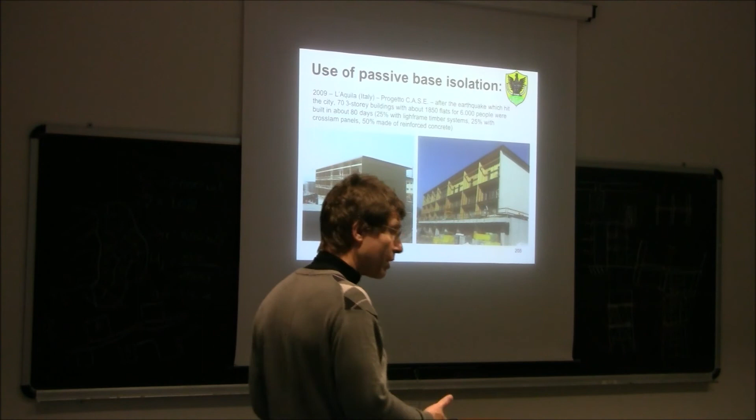If the wind is important, you may have a problem with your isolation system, because the isolation system doesn't work, or actually it works too much. It works also when you wouldn't want it to work, with wind. Of course, this is just a kind of chat we are doing together. You will study how to design a passive base isolation system next year in the course of earthquake engineering. Just keep in mind that you design for the earthquake, but there may also be the wind, so take that into account.

As I said, in general here in L'Aquila it is not a problem, but in some other regions it may be, particularly if you are in an earthquake-prone area by the sea, or maybe at a very high altitude. Then the wind may be a problem. Okay? Any question about what we saw so far?

Okay. So now, as you can see, we are proceeding towards the end of the course, and of course, since we are in an earthquake-prone region, we cannot avoid saying something about seismic design, also with timber.

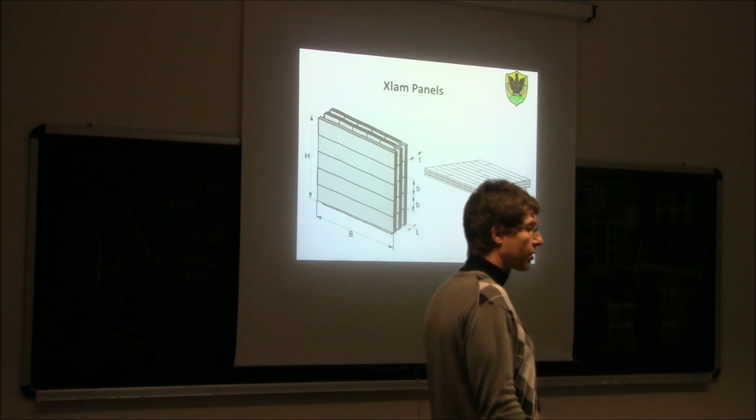So, we start with giving some basics for cross-lam materials. We already learned what is a cross-lam panel, what it is made of, the advantages. And now when it comes to designing an X-lam member, perhaps here we didn't say anything, so it's time now to say something. So, there is a simplified theory. We can use a simplified theory to design a cross-lam panel; the simplified theory is based on those two hypotheses, which are, if you look well, more or less always the same.

So, first hypothesis: only the different plank layers perpendicular to the design section carry the load. You remember we already discussed this. If you have a cross section like this, subjected to, for example, out of plane bending moment or axial force, or even in plane bending moment. So bending moment applied in this direction here.

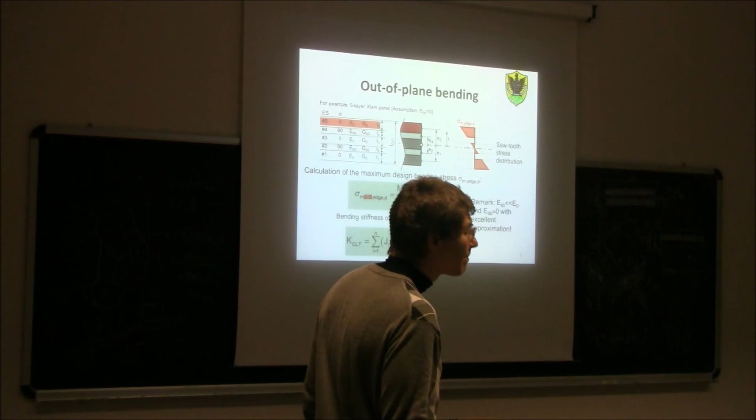Which modulus of elasticity do I need to use here? Is it the modulus of elasticity parallel to the grain or perpendicular to the grain? Parallel to the grain, because as we said, we know the other one is equal to 0, right? So parallel to the grain, and then the mean value or the characteristic value? Because if you look at the regulation, you find the mean value and the characteristic value. Which value should we use? Do you remember when to use the mean and when to use the characteristic?

The mean value. We usually use the mean value. We use the characteristic when? Be careful here. The mean is used for serviceability and for ultimate limit state. This is ultimate limit state, but why is it not used here? Because for ultimate limit state, the Young's modulus is going to affect the ultimate limit state only when we talk about buckling, flexural buckling. Here it does not affect.

In fact, you can see that if you put the E here, then you can simplify with the E above here. So it's not really needed. So the flexural stiffness is needed when? It's needed when we calculate the deflection, so then we use the mean value. Instead, the characteristic value of the Young's modulus is needed when it affects the ultimate limit state. This is the case when we have either flexural buckling or lateral buckling. In this case, we need to use the characteristic value of the modulus of elasticity.

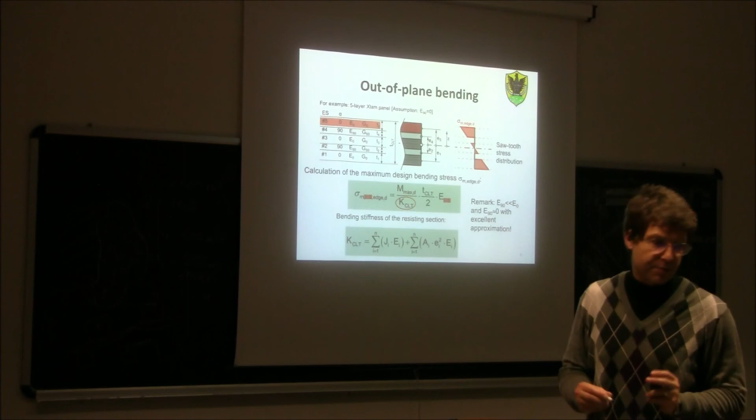Now I think we can finish, for sure, because we are late. Tomorrow we are going to talk instead about shear, because shear is a slightly more complex problem here. You will see that what we introduced some months ago, rolling shear, we never used. When we check the cross component, we will have to use the rolling shear. In this case, we may have the rolling shear as a stress acting in our layer.